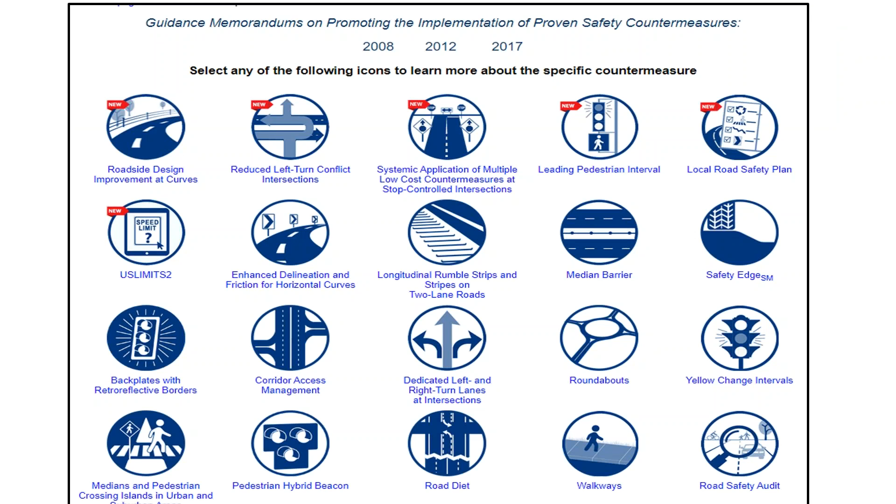So here's our list of 20 countermeasures from their website. Not all of them necessarily deal with rural roads, so we're going to whittle this down today to talk about, I think, 6 or 7 of these.

First, a little background on roadway departure safety. Those are the type of crashes we're really trying to focus in on, on our 2-lane rural roads, to help decrease this type of crash, the roadway departure crash. Some of these countermeasures are designed to keep vehicles on the roadway, like our signage and pavement markings, friction, things like that.

And then some of the countermeasures are designed to provide for a safe recovery if the car does go off the side of the road, so they can come back onto the roadway quickly and safely. The third type of countermeasure is where there's going to be a crash — they've left the roadway and are going to crash into something — so we want to reduce the severity of that crash with different hardware and strategies.

So which of those 20 proven countermeasures are applicable to 2-lane rural roads? Today we're going to look at 7 of these. First will be enhanced delineation and friction at horizontal curves.

And then next was the systemic application of multiple low-cost countermeasures at stop-controlled intersections. And then we'll get into the rumbles, longitudinal rumble strips and stripes on 2-lane roads. And then we'll talk about the safety edge, and the roadside design improvement at curves.

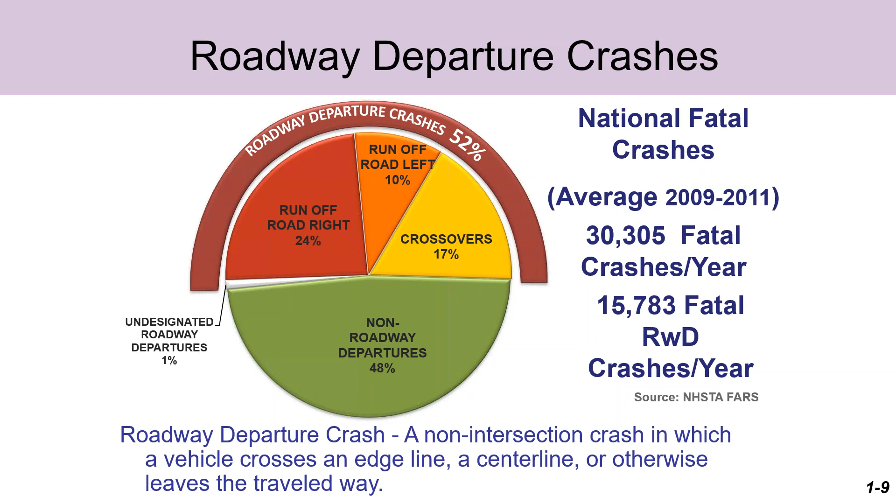First, let's define what a roadway departure crash is. It is a non-intersection crash in which a vehicle crosses an edge line, a center line, or otherwise leaves the traveled way. So you see some statistics there in that chart. Roadway departure crashes make up 52% of all our fatal crashes. It breaks down further into run off the road right, run off the road left, crossovers, and other types of non-roadway departure crashes.

So these countermeasures we're talking about today are part of our strategy called the systemic approach to safety. It's the reverse of the traditional approach, which involved focusing on hot spots, doing safety studies, and usually putting together a higher priced roadway safety project, like straightening out curves or adding lanes to traffic or something like that.

So the systemic approach involves low-cost countermeasures, and we place them where we find overrepresentation. We install these countermeasures systematically at numerous locations, not limited to the hot spots on your crash map.

So overrepresentation — if these crashes say 5% of the mileage equals 20% of the statewide problem — we're focusing on a statewide reduction of roadway departure fatalities. To give you an even better idea what we're talking about with systemic, let's take a look at this exercise from our roadway departure class here at LTAP.

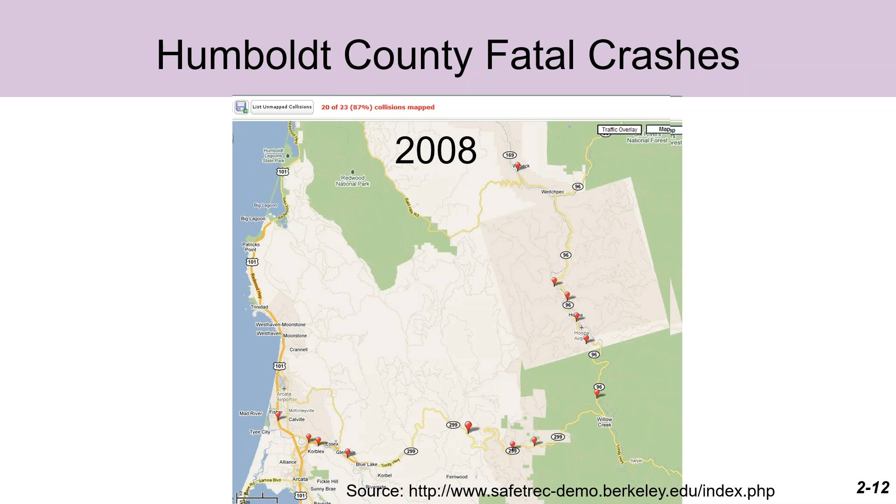You'll see there's some red dots more on their western edge and a couple on the eastern edge. In 2007, we see some more on the south side and one on the far northeast. None of these crashes occurred in the same curve. And same way with 2008, they had several more fatal crashes on the south side of the county and east side of the county, but none in the same curve from previous years.

And so it's a different location for each one of these fatal crashes over the 4-year period.

But then we take a look at the fatal crash types instead of the locations. We focus on the crash type from 2005, 2006, 2007, 2008, and you'll see that the top 3 types of collisions each year are head-on, side swipe, and rear end. And if you look at the percentage of crashes involving those top 3 across each year, you'll see that even the percentages are very similar. So the conclusion would be that fatal crash locations are random in that scenario.

However, the fatal crash types are predictable. And so here's a couple examples of townships. In Ohio, we're kind of famous for our rural township curvy roads. They look very much like that Humboldt County location, don't they?

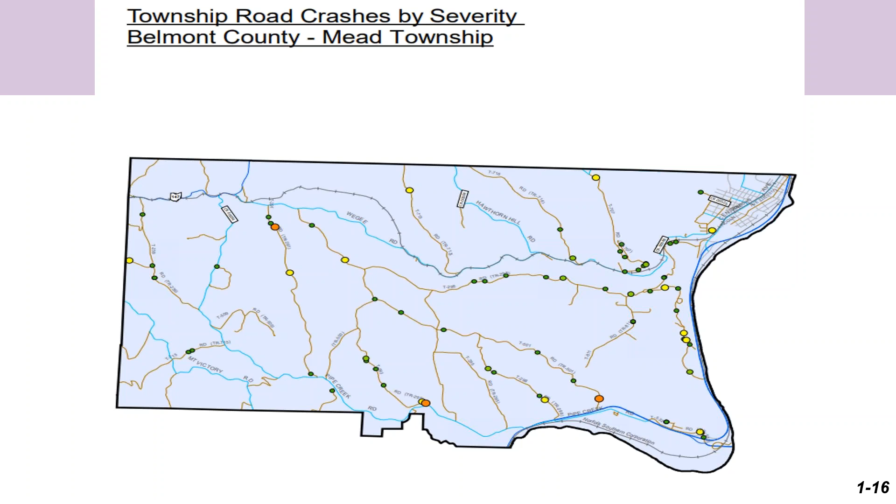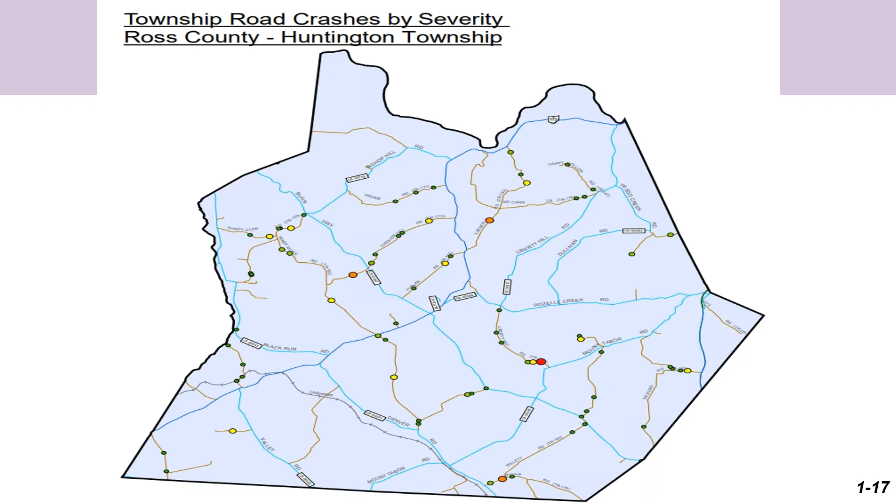So here's Mead Township in Belmont County. You see lots of different dots and different curves. And here we have Ross County, Ohio, Huntington Township. All these crashes are happening in different locations, different curves, for instance.

So we want to apply our low-cost treatments systemically, where we have these similar types of locations. So let's take a look at these different countermeasures. We'll start off with the first one on the list, enhanced delineation and friction for horizontal curves. Again, we're focusing on curves here.

There's so many of our rural road crashes on two-lane roads that happen in curves. A majority happen in curves. So if we can improve the safety on the curves, we're getting a lot of bang for our buck, big time. If we take a look at the data, curve crashes account for 42% of rural roadway departure fatalities, so definitely some room for improvement there.

Let's take a look at our enhanced delineation treatment. These help alert drivers in advance of the curve and vary by the severity of the curvature and operating speed. Price ranges for these strategies are low to moderate. Let's take a look at some of these. The picture there is an example of chevron signs installed along a curve.

Crash types addressed by delineation are curve crashes and head-on collisions. A lot of head-on collisions happen within curves, or people go out of their lane and cross the center line. Nighttime crashes are also addressed, because with the latest delineation and signage they've improved retroreflectivity for nighttime driving, and other run-off-the-road crashes.

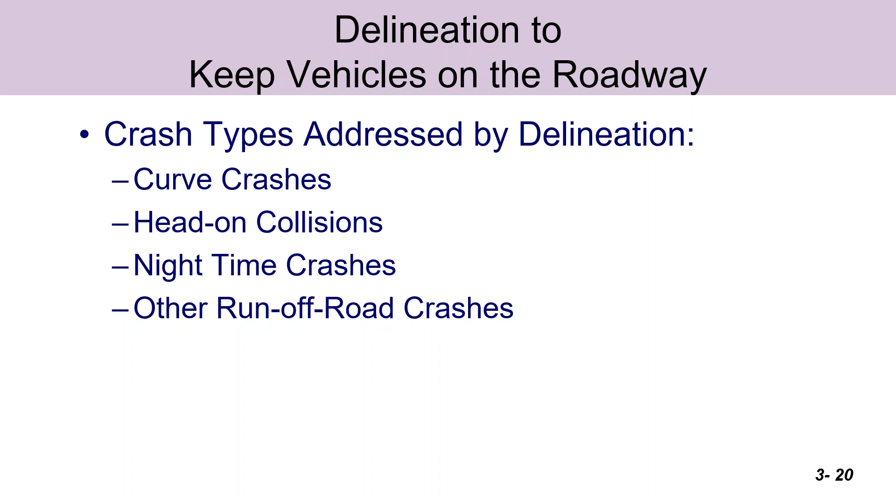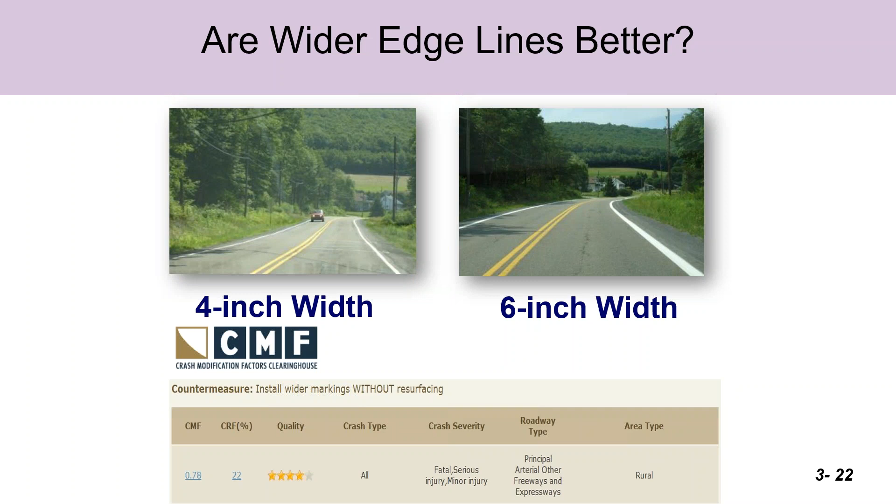There's also pavement marking. The OMUTCD and the national MUTCD have requirements for the use of edge lines, and we can even improve on them. The standard edge line is 4 inches. One improvement you can make is to make those white edge lines 6 inches wide throughout your curve to give better guidance as someone traverses through the curve.

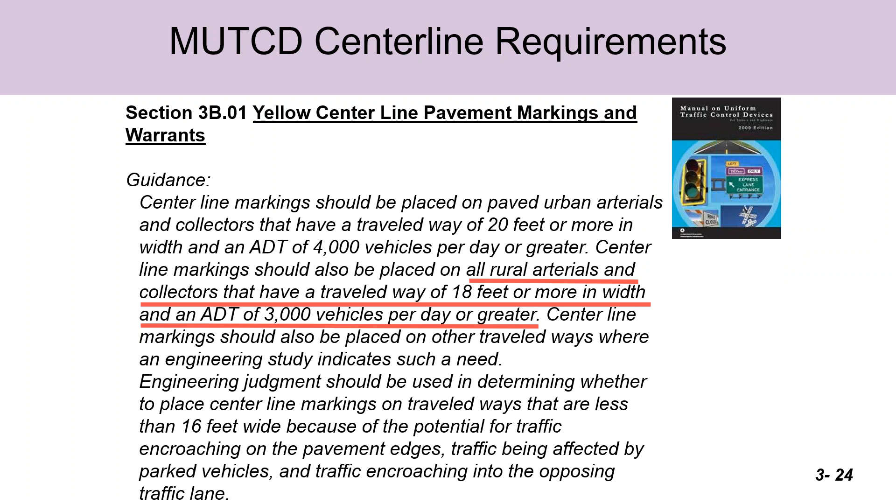Also, yellow center lines are required on a lot of roads that have 3,000 vehicles a day or greater. It turns out there's not a law against putting a yellow center line on roads that have less than that. Under guidance, it says 3,000 and over. And some roadways have been studied with even fewer cars than that for the center line treatment, and they reduce crashes as well.

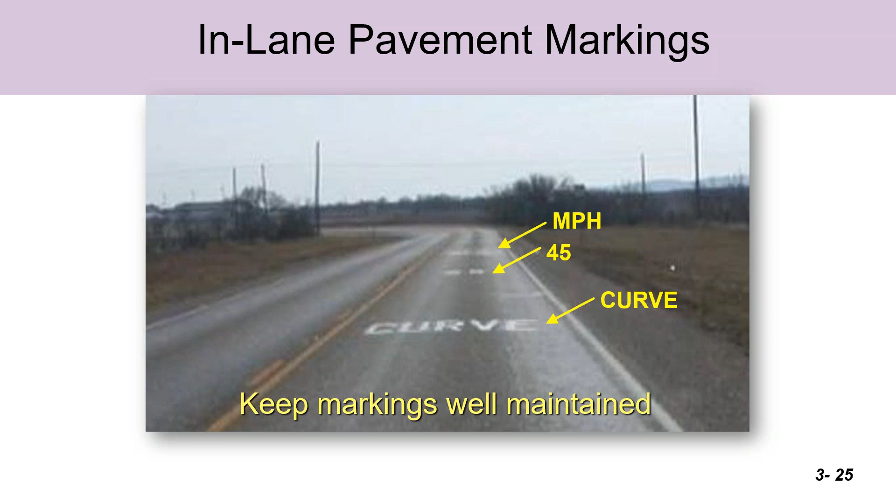Other types of pavement markings are in-lane pavement markings. There's an example of just the curve written on the pavement along with the speed limit. Here's a PennDOT example of an advanced curve warning for the in-lane pavement marking.

Also, if you have a guardrail on your curve, it's always good to have a reflective barrier delineation. You should make sure that, as you see in these pictures, you have retroreflective sheeting on the guardrail itself to provide guidance through the curve.

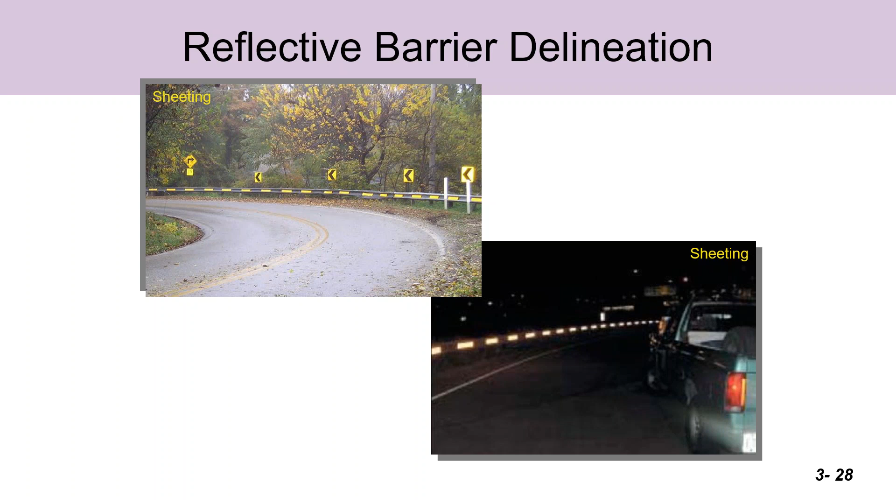Some statistics about the benefits of providing advanced warning signing for curves: the Crash Modification Factors Clearinghouse, through their studies, shows that just putting up a sign in advance of your curve, like the one in the picture, can reduce your crashes by 30%. That's an amazing bang for your buck for just the cost of a sign. The more information you provide to the motorist in advance of the curve, the safer they will be.

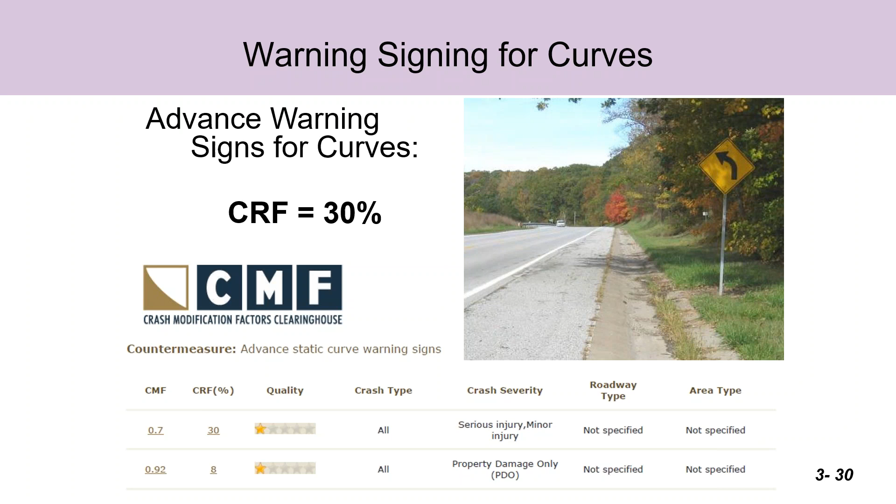There's also guidance here in the National Manual, as well as the Ohio Manual of Uniform Traffic Control Devices, about what is required for signage and delineation in your curves. This lets you know when an advanced warning sign is required, when an advisory speed plaque is required or recommended, and chevrons as well.

Again, here's a chart that helps with the requirements of your horizontal alignment sign selection—what's required and what's recommended when it comes to the difference between the speed limit and the advisory speed.

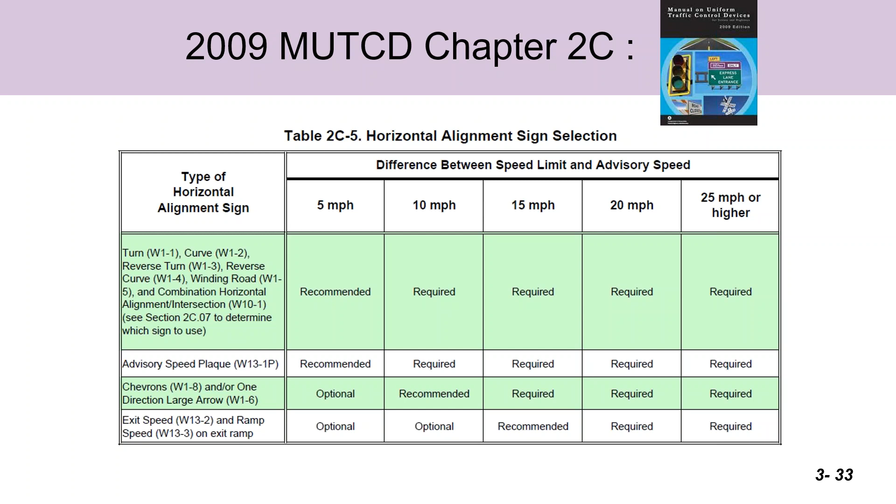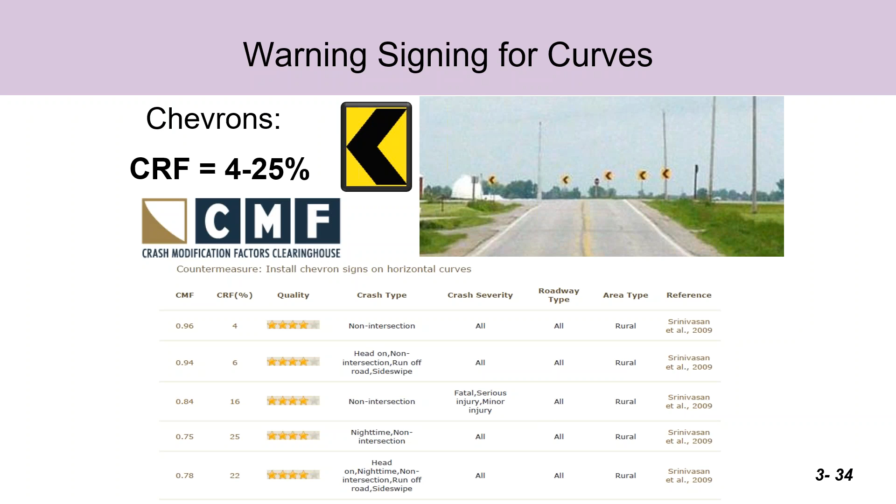Here's some more information on chevrons. Studies show crash reduction anywhere from 4 to 25% just for putting chevrons in your curve. As you can see going down, the bottom one covers head-on crashes, nighttime crashes, run-off-the-road, and side-swipe crashes. They had a reduction in crashes of 22%, compared to places where they did not have chevrons.

Another thing that really improves the guidance throughout the curve is to add post-mounted sheeting or post-mounted delineation to the chevrons, the large arrow, or your advanced warning signs. It really makes those signs stand out—you can't miss them.

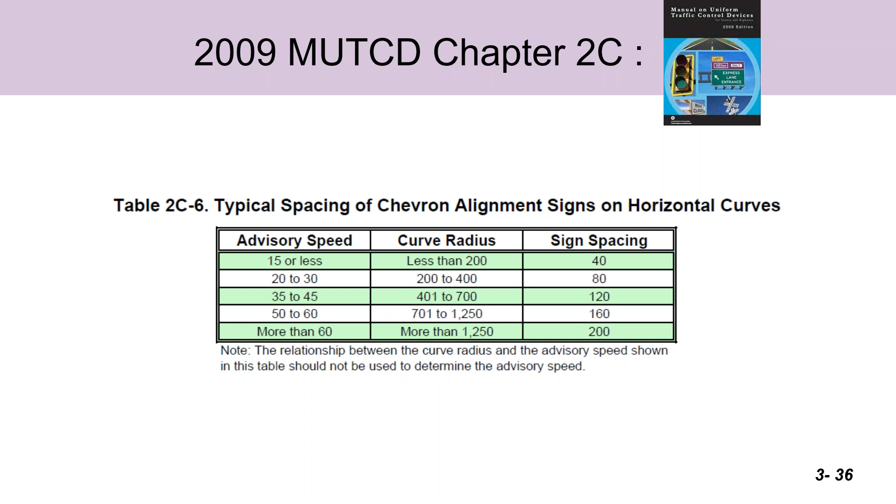There's also a chart in the MUTCD and Ohio manual to help you determine the proper spacing of your chevron alignment signs throughout the curve.

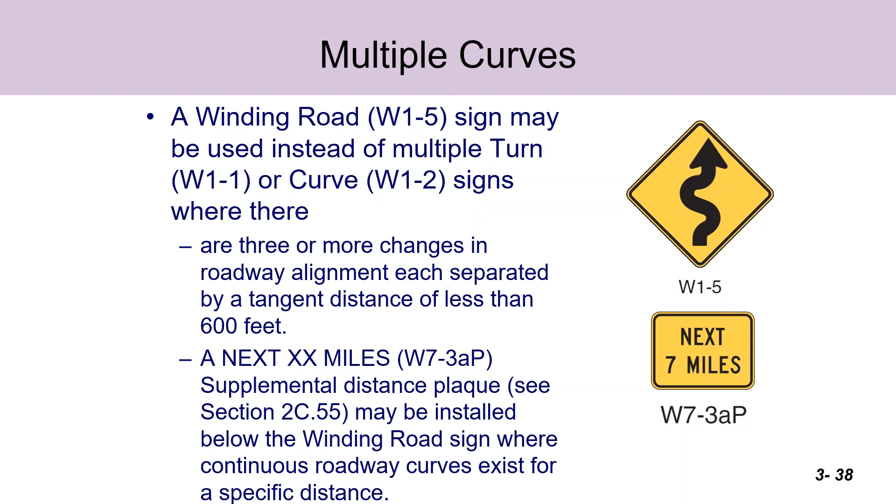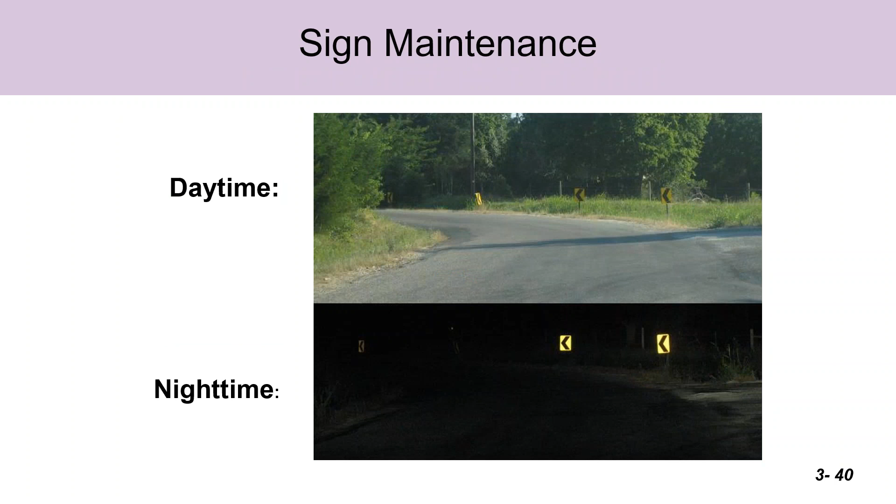Also take regular care to make sure your signs are where they're supposed to be for chevrons. If they're not aligned properly for the headlights, as you can see in this picture, some of those chevrons don't show up at night.

Vegetation management is also very important throughout the spring and summer, making sure the motorist can actually see those signs in advance. It's important to have a good vegetation management program as well.

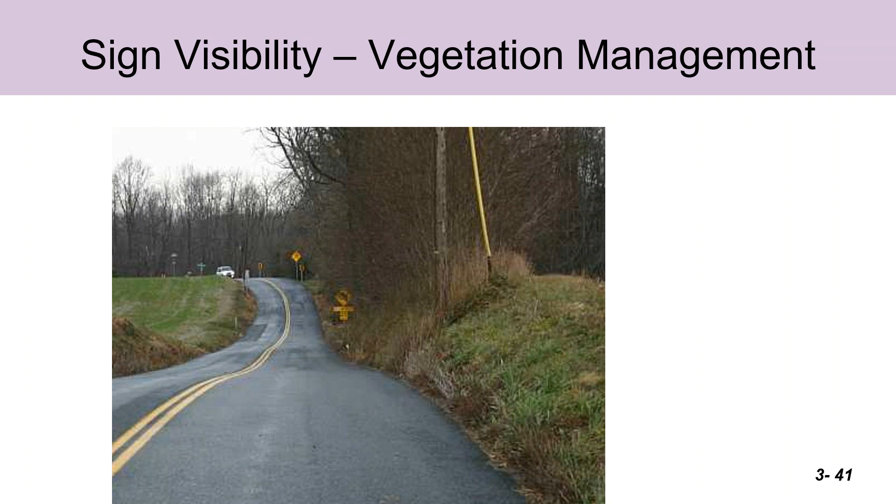Let's move on to the next countermeasure: increased pavement friction for curves. This involves a high friction surface treatment, or HFST, another one of our highly cost-effective countermeasures.

High friction surface treatments compensate for the high friction demand at curves, where available pavement friction is not adequate to support operating speeds, due to situations like sharp curves or inadequate cross-slope design.

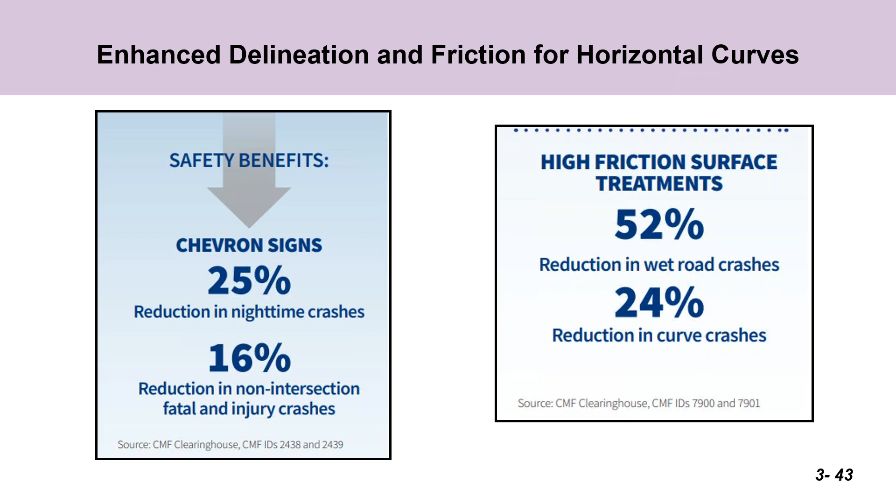There are some benefits and statistics involving friction and signage. Safety benefits: chevron signs show a 25% reduction in nighttime crashes, 16% in non-intersection fatal and injury crashes. High friction surface treatments show a 52% reduction in wet road crashes and 24% reduction in curve crashes. I've seen much higher percentages for that as well.

Here's how friction enhances your safety during wet conditions. Polished roadway surfaces occur where the roadway hasn't been resurfaced in a number of years, so the aggregate becomes polished and you lose friction value.

Even speeders, if they're exceeding the advisory speed significantly, run the risk of skidding off the roadway. So we need to provide skid-resistant pavement surfaces to reduce the likelihood of a vehicle leaving its lane, crossing the centerline, or leaving the roadway at a horizontal curve.

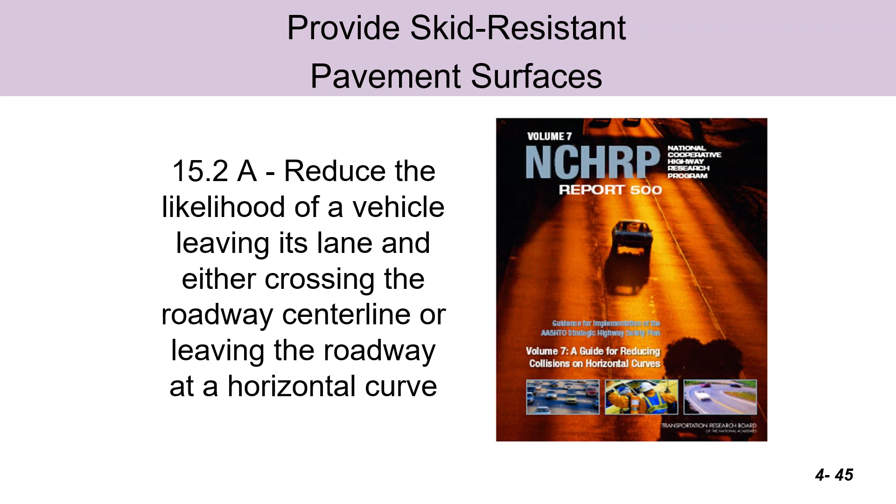This was focused on in the NCHRP Report 500, Volume 7.

United States Code 402 states every state shall have a program to improve highway safety, with standards for pavement design and construction with specific provisions for high skid resistant qualities. Each state shall also have a program for resurfacing or other surface treatment, with emphasis on correcting locations or sections of streets and highways with low skid resistance and high or potentially high accident rates susceptible to reduction by providing improved surfaces.

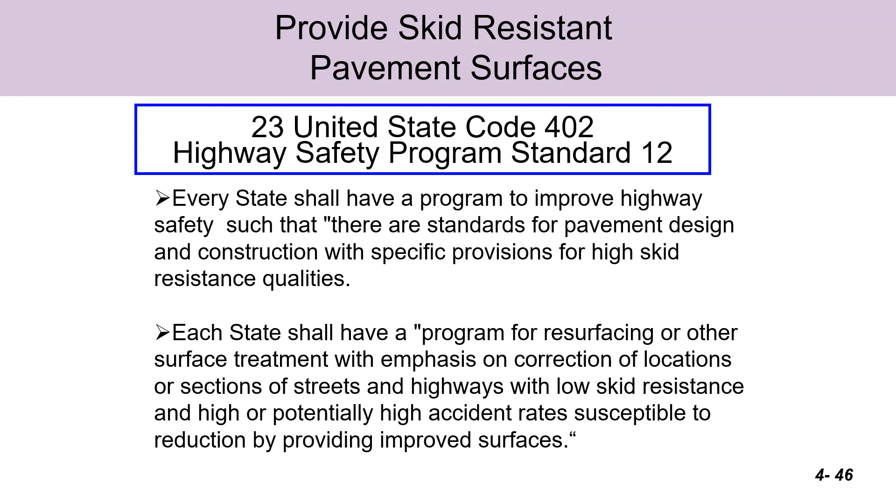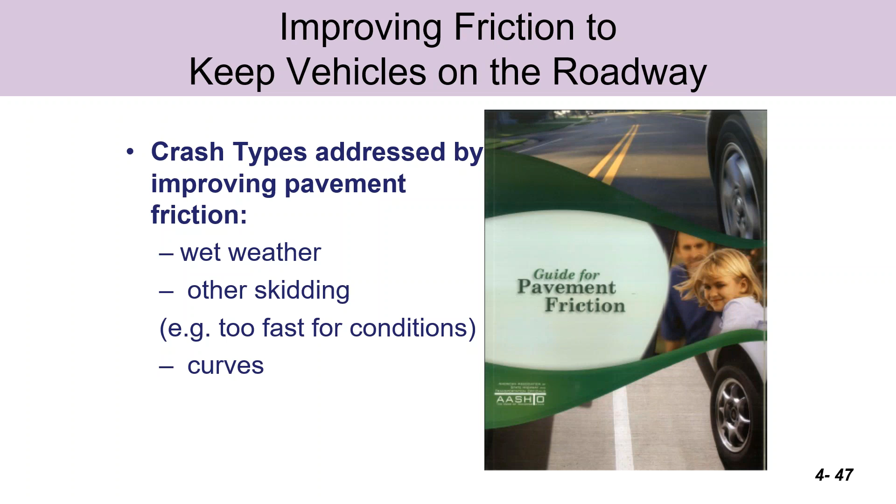Improving friction helps keep vehicles on the roadway. Different crash types addressed by improving friction include wet weather skidding, other skidding, and of course curve crashes, which we're focusing on today.

There is guidance material that provides more information on this through NCHRP. You can actually Google this document and download it for free: NCHRP web-only document 108, Guide for Pavement Friction.

Some strategies for reducing crashes: where can friction benefit safety? At locations like horizontal curves, the approach to intersections where people need friction to help them come to a stop, and different grades, such as downhill grades.

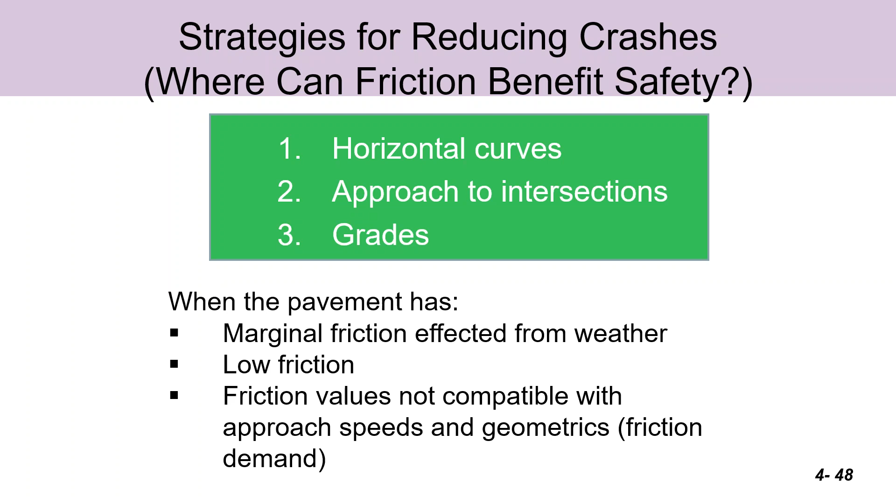Some other factors related to skid crashes include road geometry, vehicle speeds, driver actions, weather conditions, and traffic characteristics.

We can really get into some of the science of friction, which of course involves the laws of physics at play as you drive through a curve. The margin of safety against skidding on curves is defined as the difference between the available tire pavement friction and the friction demand of the vehicle as it tracks the curve.

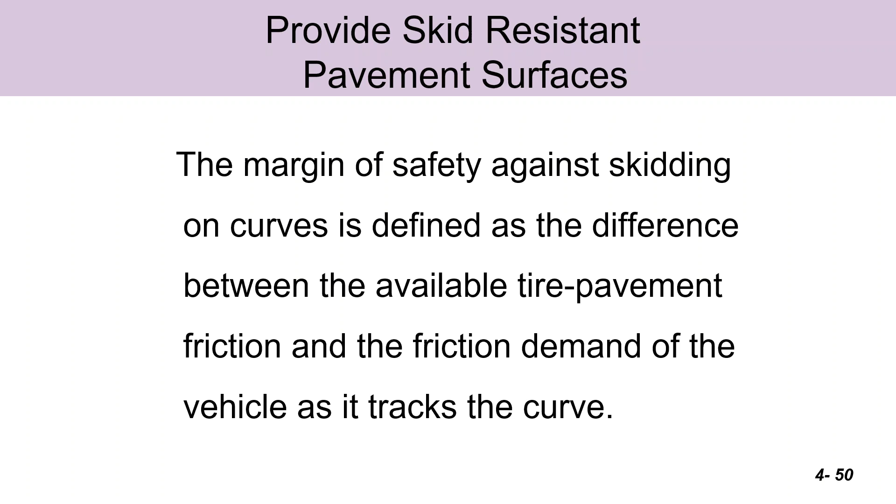If we can improve on the friction, we can improve the vehicle itself and keep it on the roadway at that speed. Here's an AASHTO horizontal curve design model. The equation in the top left says E plus F. E is super elevation of the curve, like a NASCAR track, and F is the side friction factor. Those two values are your friends as you drive through a curve — they are the only two forces keeping you on the roadway.

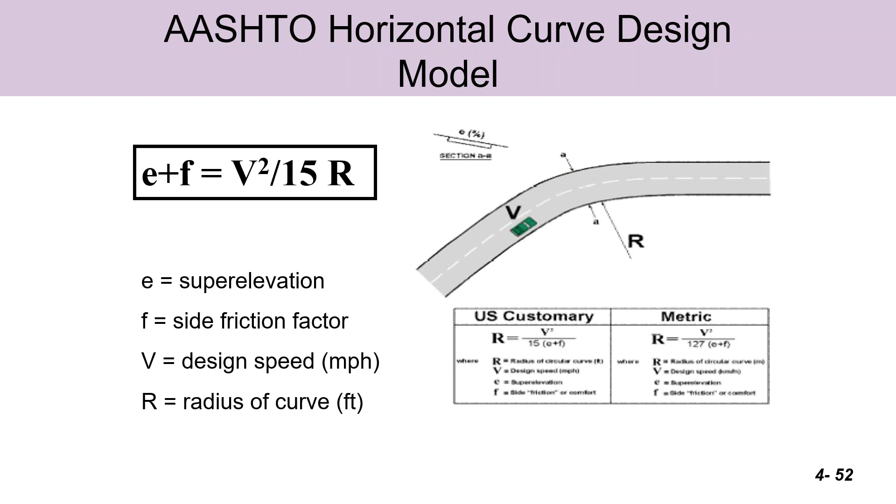The problem with our rural roads is that a lot of them have no super elevation, so all you're left with is your side friction factor helping you. It's very important for our two-lane rural roads without super elevation to make sure they have a good level of friction.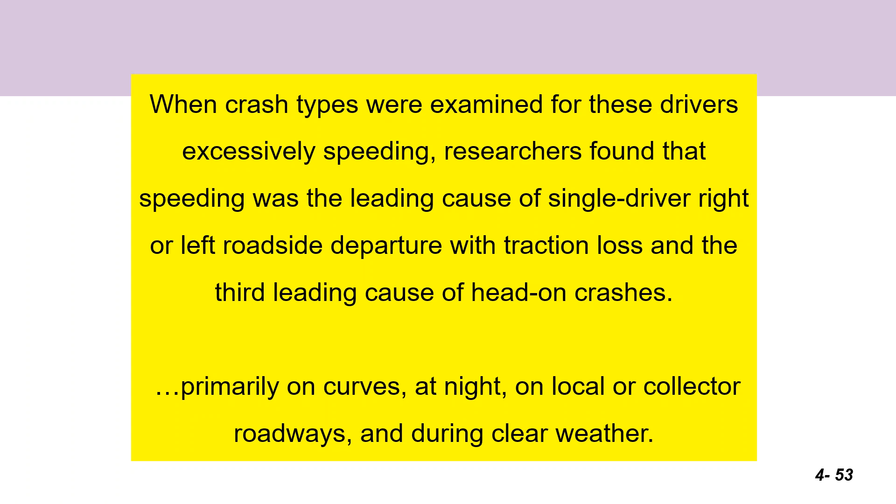Skidding-type crashes happen primarily on curves at night, on local or collector roadways, and during clear weather — so even on dry pavement, these skidding crashes happen in curves. Another vehicle that has problems with curves is big trucks. You've heard about trucks rolling over at interchanges and in curves. When they study these rollovers, they determine that before the truck rolled over, it actually went into a skid first. So if we can prevent them from skidding by improving friction, we can prevent the rollover.

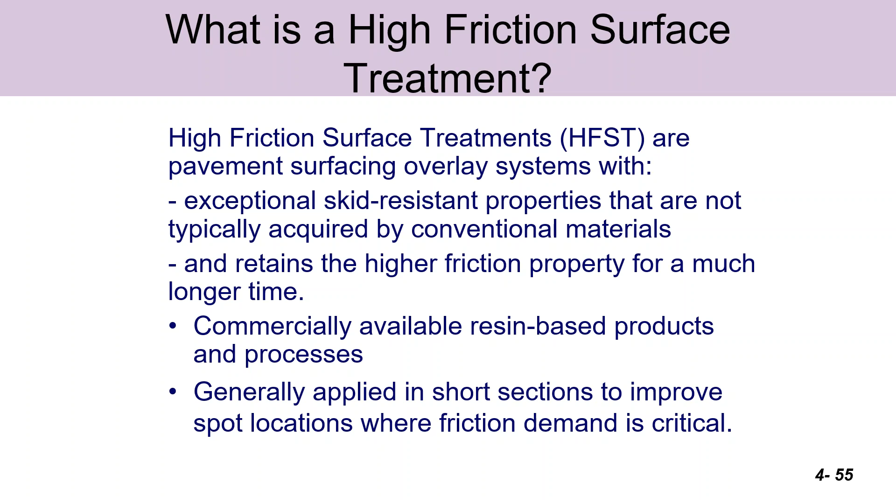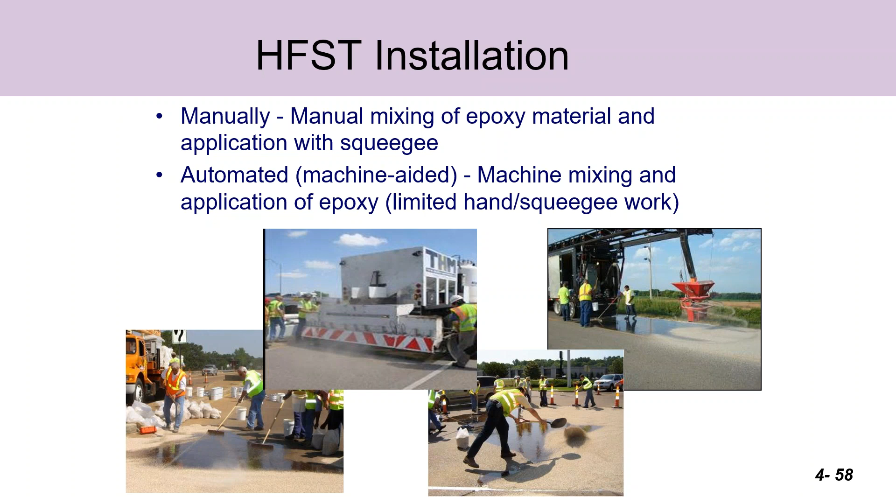Here are some pictures of an HFST installation. You see the workers on the left spreading out the resin, and the second picture is a machine that spreads the aggregate evenly. There are other ways to do this too, even by shovel or by hand — the fourth picture shows a machine that distributes the aggregate.

We even tried this in Ohio, in Hamilton County. This county road had a high number of curve crashes running off the road. In the year after this HFST was installed, there were zero curve crashes — what a reduction that was.

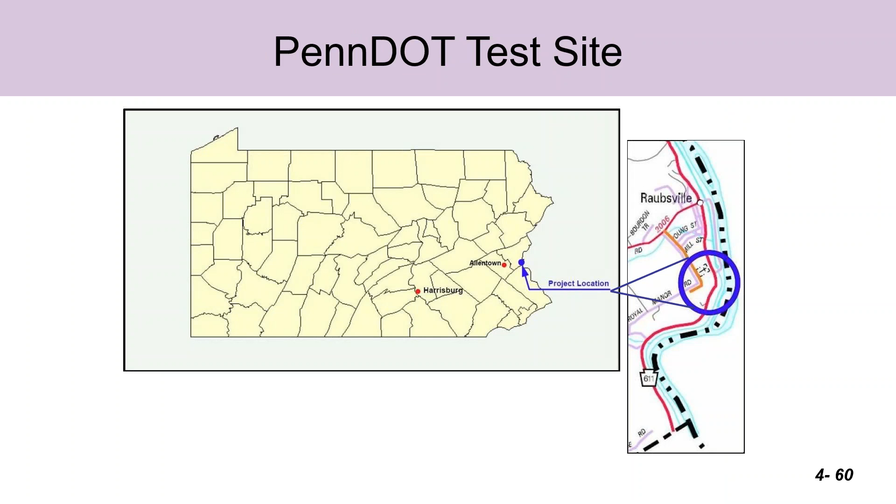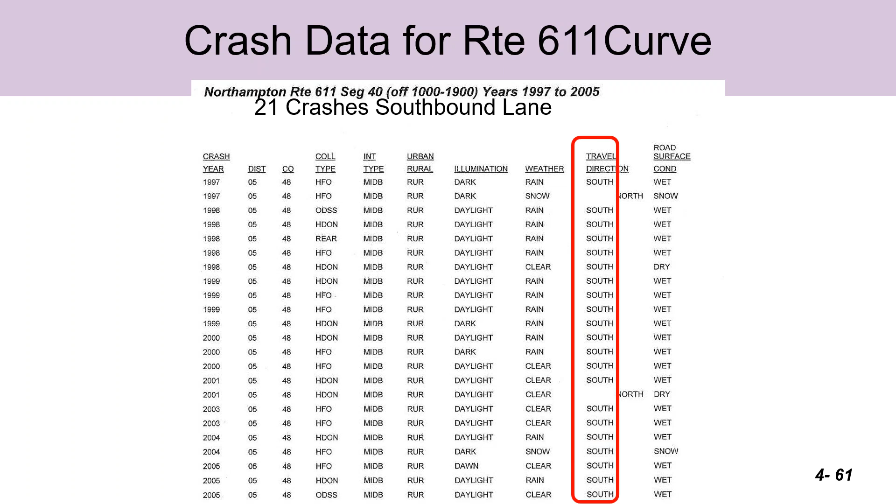When this first came out back in 2012, I believe, there were lots of studies in several states. PennDOT, for instance, studied a curve here. As you can see in the second-to-far-right column, all the crashes in this curve involved southbound vehicles, so they wanted to try the HFST treatment in the southbound lane. The crew came out at 8:30 a.m. and began their project, installing it, and by 2:30 p.m. that afternoon it was ready for traffic.

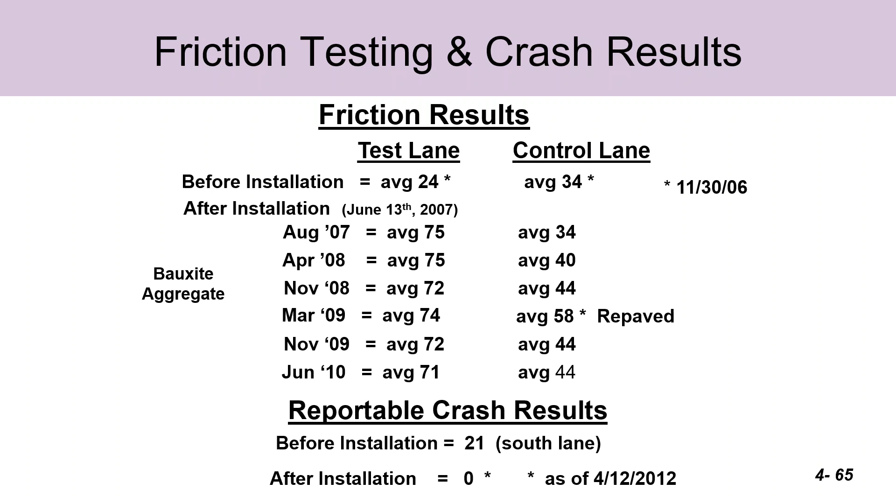The results show: before installation, there were 21 crashes, and the friction value was improved — the 75 represents a very high friction value compared to the control lane. In the year following installation, there were zero crashes — so it went from 21 crashes to zero. You get really big, really good results from that friction treatment. We want to see that friction treatment more often here in Ohio on our two-lane rural roads.

Okay, let's move on to our next countermeasure — a systemic application of multiple low-cost countermeasures at stop-controlled intersections. You've probably seen this before, our LTAP sign grant. We've been pushing to have these sort of treatments when we buy road signs for our townships. It involves more advanced warning, like doubling up on the advanced warning signs for the stop condition at the intersection, and also for the through approach, doubling up on the advanced warning signs for the intersection.

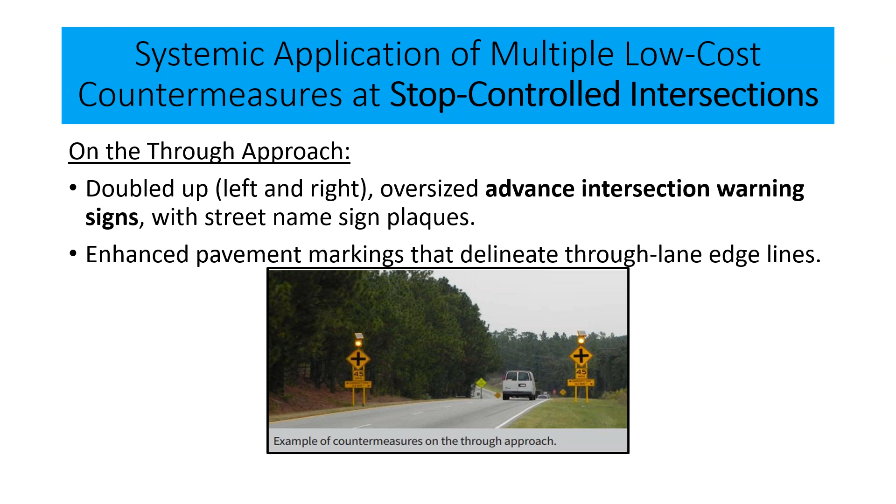So doubling up and using oversized advanced intersection warning signs, even adding street name sign plaques, basically providing more information to the motorists as they approach the intersection, and also enhancing pavement markings that delineate the through lane edge lines, and also a properly spaced stop bar at the intersection.

And there's other countermeasures as well: flashing solar LED beacons on advanced intersection warning signs and stop signs, or a flashing overhead intersection beacon, reflective panels on signposts.

Those are definitely very helpful, and I think they're like $4 a piece, but they sure do provide really good advanced warning. Dynamic warning signs, the flashing electric signs that have messages.

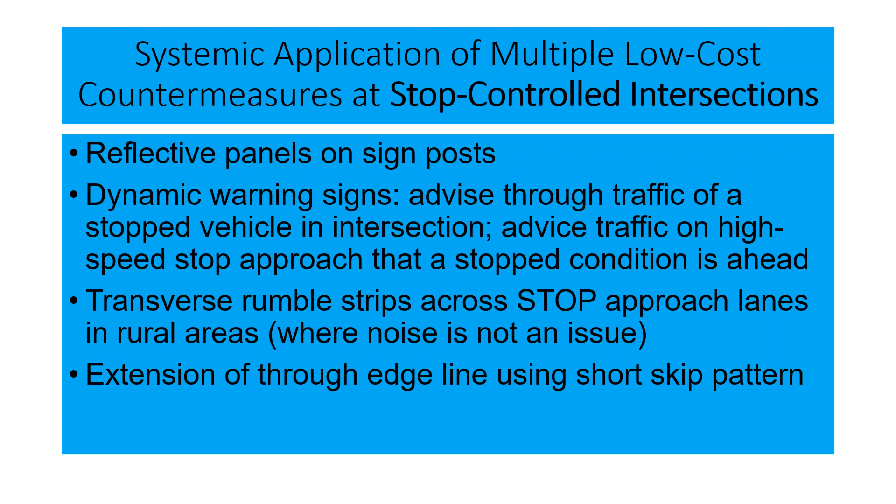Also transverse rumble strips across the stop approach lanes, and the extension of the through edge line using a short skip pattern. And there's more to the list: skid resistant surfaces, new upgraded lighting, some pavement marking treatment called lane narrowing, peripheral transverse pavement markings, and dynamic speed warning signs.

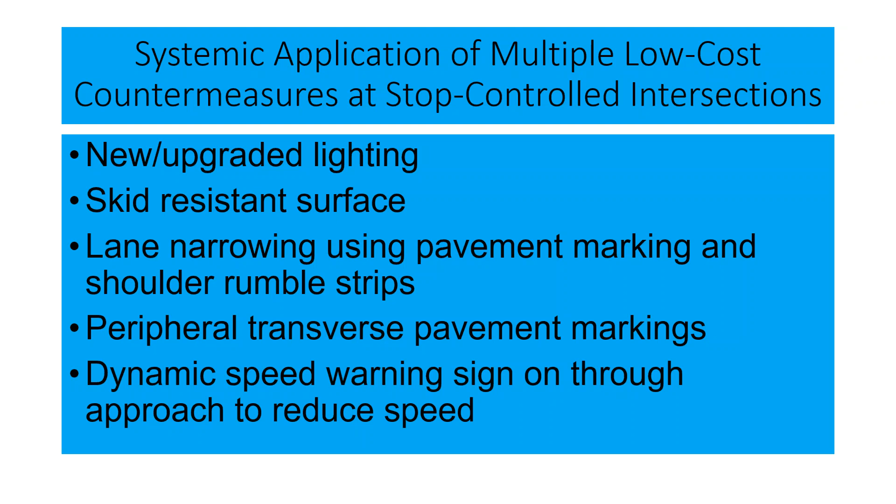So these are all part of this initiative. Even like you saw it from Pennsylvania, where they put 'slow' on the pavement markings. Let's put that word on the pavement. Other high friction surface treatment.

Of course, roundabouts would even fall into this category. Adding left turn lanes at an intersection definitely adds safety. Or making sure an intersection is a 90-degree angle instead of skewed. That makes it safer. Okay, next we have our next initiative involves the rumble strips and stripes.

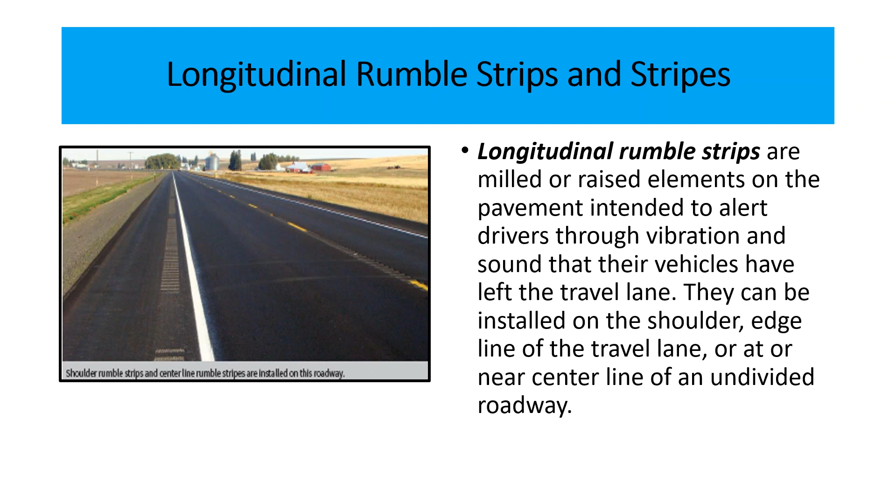And so these are either milled into the pavement or raised, and they are intended to alert drivers through vibration and sound that their vehicles have left the travel lane. They can be installed on the shoulder, the edge line of the travel lane, or at or near center line of the undivided roadway. And so a rumble stripe is where we put the rumble strips right on the edge line.

And this can result in an increased visibility of the pavement marking during wet and nighttime conditions, which is a very good benefit. And it goes on to show you some data of the safety benefits.

There's a 44 to 64% reduction in head-on collisions or opposite direction crashes or side swipe fatal and injury crashes. The shoulder rumble strips go anywhere from 13 to 51% reduction of single vehicle run off the road fatal and injury crashes.

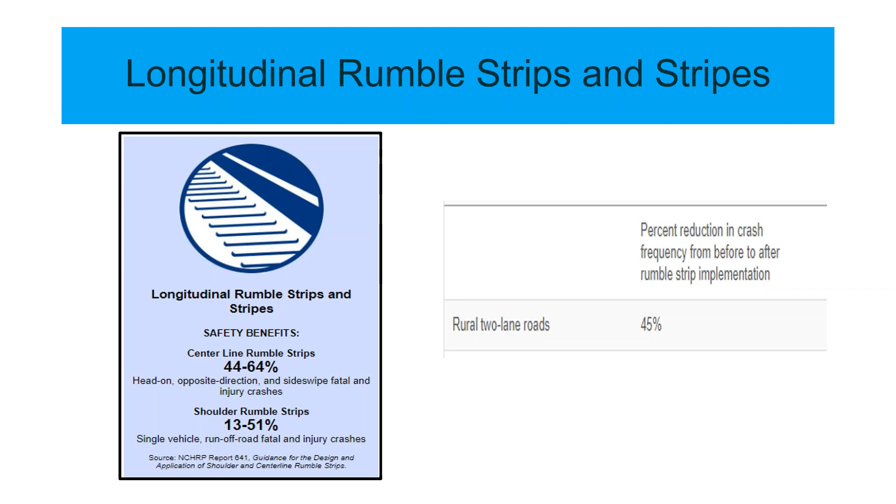So the other one on the right shows a 45% reduction in crash frequency after installation of rumble strips on rural 2-lane roads. So we want to see more rumble strips and stripes in Ohio on our 2-lane rural roads. You can read further about it in a booklet called the Decision Support Guide for Installation of Shoulder and Centerline Rumble Strips on Non-Freeways.

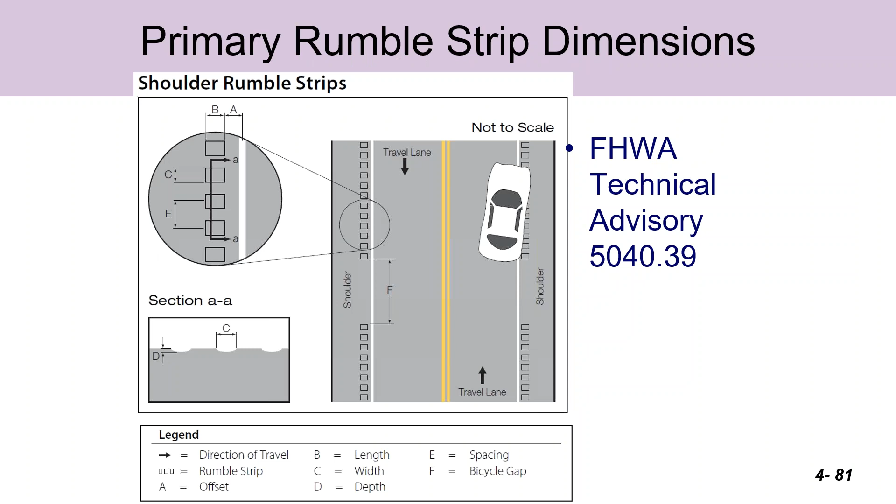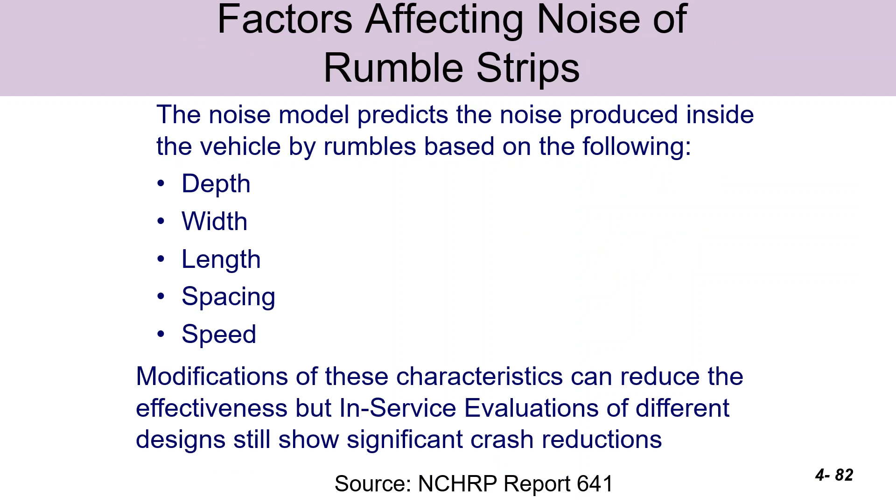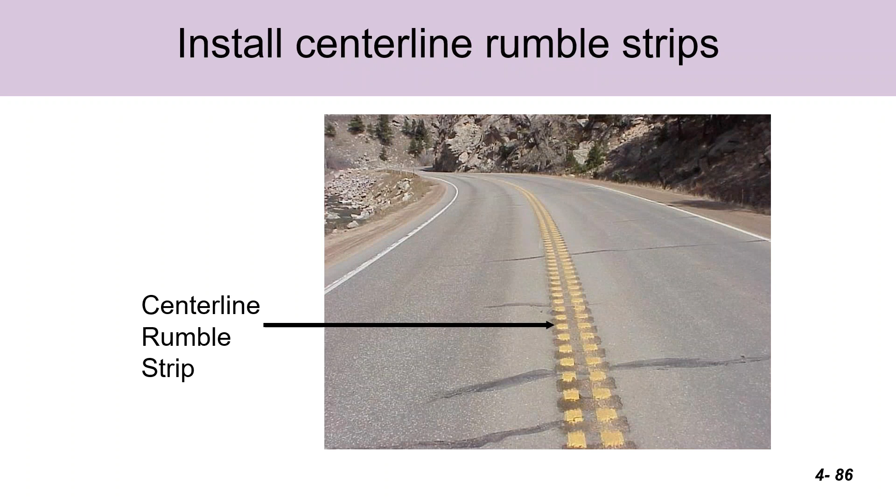Okay, what else do we got here? Different variations of the centerline rumble strips. They're on double yellow, actually milled into both sides of the double yellow line. And they're milled across the markings, across the joint, or on both sides of the joint. So there's different ways to do it depending on the road you're on.

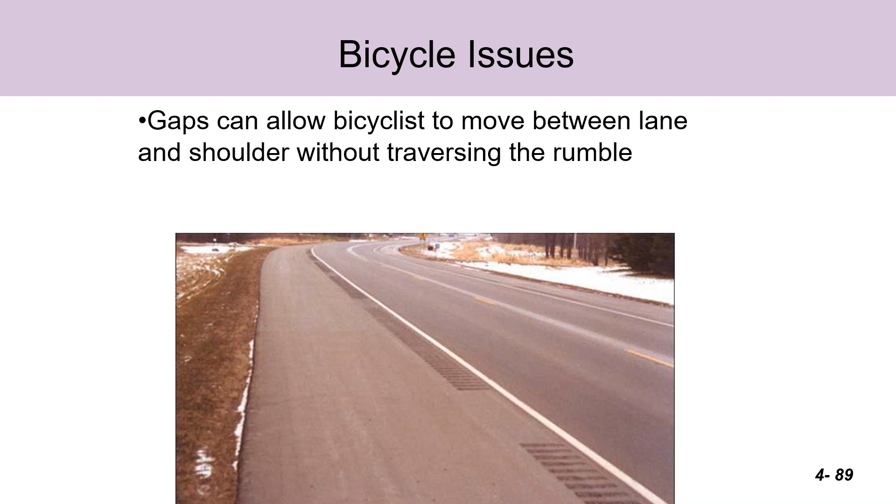And if you're thinking that the bicyclists will hate these, we actually have a way to make them bicycle friendly by providing a gap every, you know, whatever distance you select, 30 or 40 feet or more, so they can go in and out, because bicyclists actually prefer to be in the lane if cars are not coming, because there's less gravel and broken glass and stuff in the lane versus on the shoulder.

Okay, and it of course also helps them to hear the traffic coming from behind them as well. Also motorcyclists, you might think won't like these, but there's a big study of 9,845 motorcycle crash reports, and the conclusion of the study was no indication that centerline rumble strips pose a hazard to cyclists. So that was good.

Also, you can even put the rumbles in chip seal pavements. It's been done in many places.

So we don't see any reason why not to provide rumble strips on our rural roads.

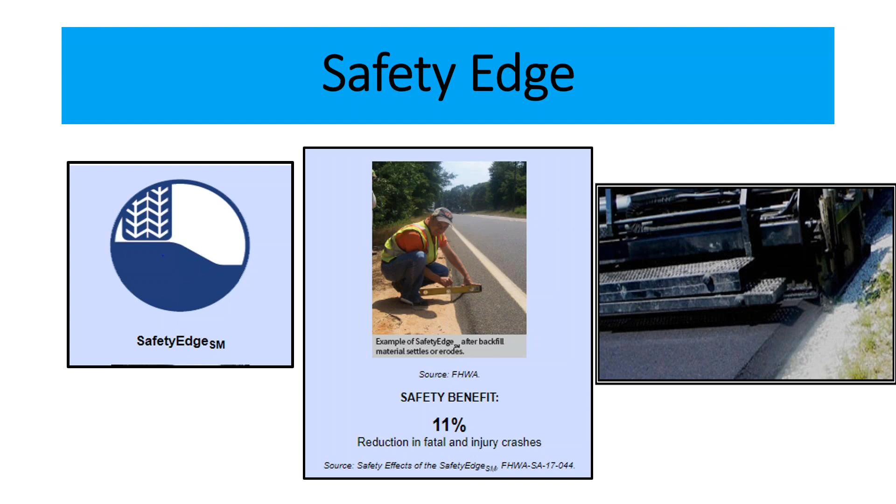So our next countermeasure is our safety edge. It's been around for quite a while, but it's still on the list because it does such a good job in reducing crashes.

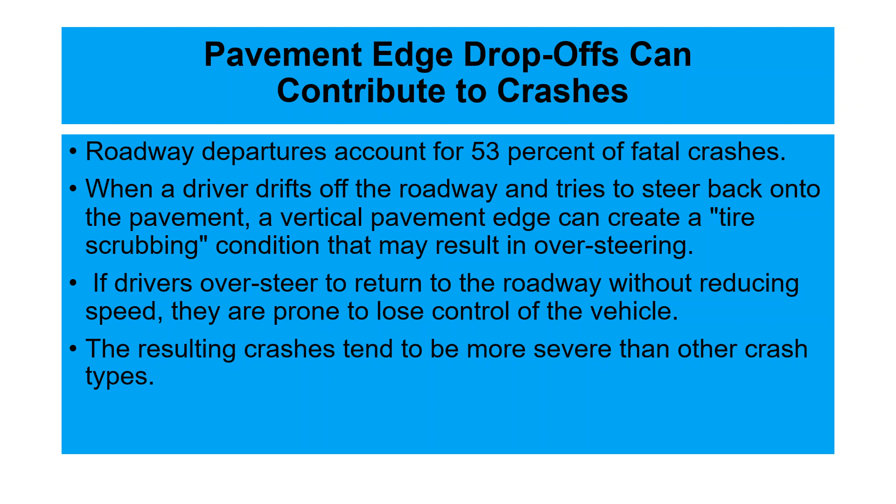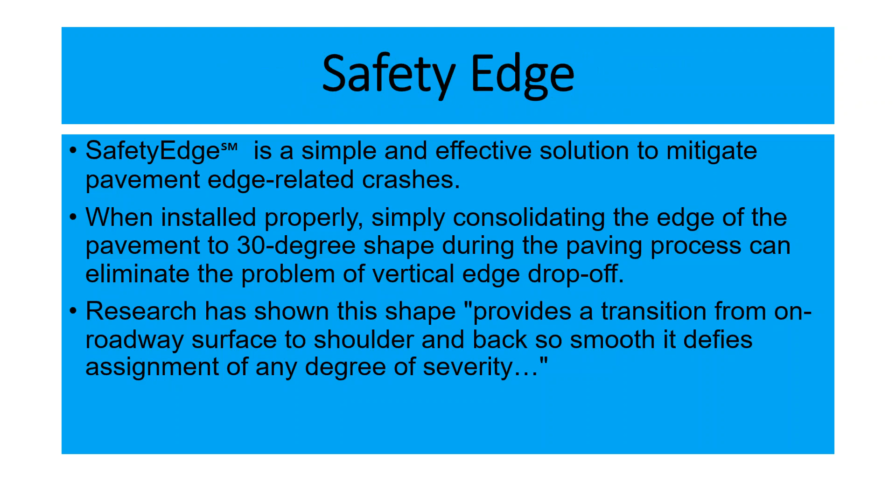The safety edge is a solution to this because it provides a 30-degree angle shape on the side of the pavement, making it very easy for the car to get back onto the pavement and stay in their lane. Calculated benefit cost ratios are very high, 500 to 1,400, but that's because there's hardly any cost to adding this to your repaving operation.

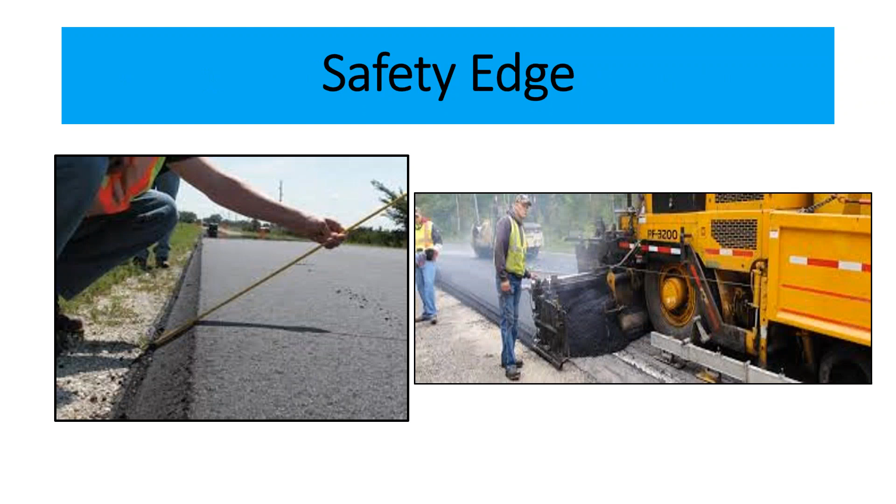So you definitely need to check out adding the safety edge to your next resurfacing project. Make it your policy to do so on your 2-lane rural roads.

So we're doing that at ODOT as well. If you look at our spec book, our 2019 spec has been integrated into it, so you can check that out. And you can contact the Office of Pavement Engineering if you have any other questions about that.

What else do we have? The next countermeasure selected here is called Roadside Design Improvements at Curves. This involves either providing guardrail or cable barrier, or also installing a clear zone.

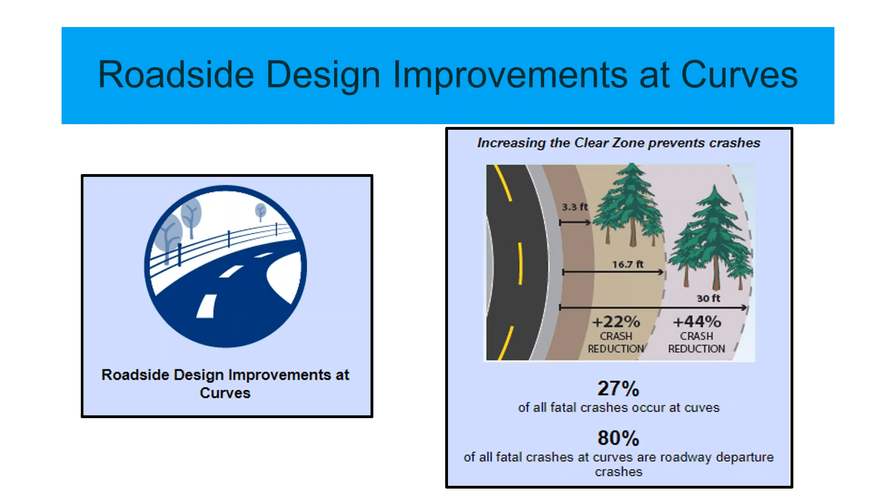That's because 27% of all fatal crashes occur at curves, and 80% of all fatal crashes at curves are roadway departure crashes. So roadside design improvements at curves is a strategy encompassing several treatments that target the high-risk roadside environment along the outside of a horizontal curve, and they prevent departure fatalities by giving vehicles the opportunity to recover safely and by reducing crash severity. These could be implemented alone or in combination and are particularly recommended at horizontal curves, especially where data indicates a higher risk for roadway departure fatalities and where cost effectiveness can be maximized.

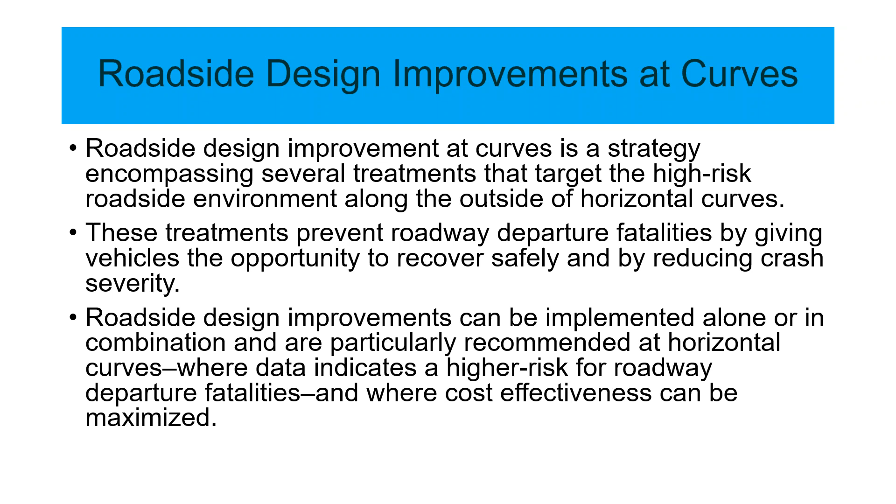Here's an example of providing for a safe recovery: installing a clear zone, which is an unobstructed traversable area beyond the edge of the through traveled way for the recovery of errant vehicles. That area is free of rigid fixed objects such as trees, utility cabinets, or poles. Trees can kill a lot of people, so do utility poles.

Another treatment is to flatten the slope of the side of the roadway, which reduces the steepness of the side slope to increase drivers' ability to keep the vehicle stable and regain control of the vehicle and avoid obstacles.

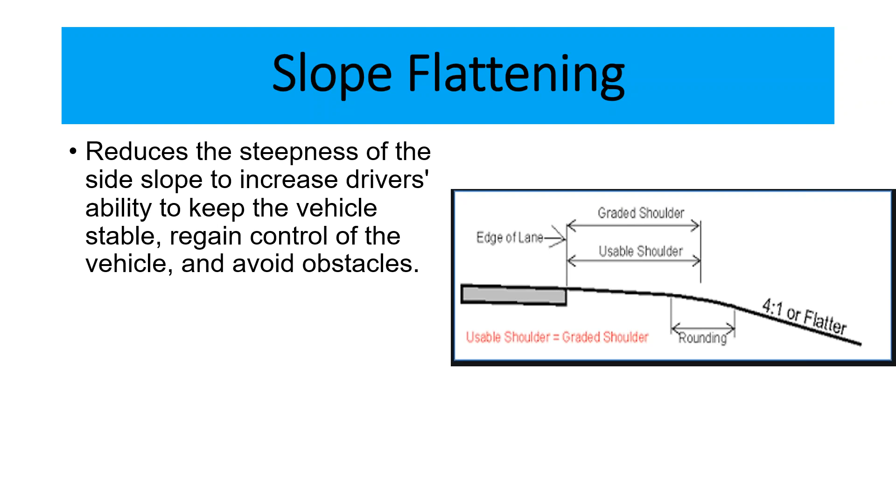Or we can shield obstacles, providing barrier for slopes, fixed objects, median barrier, and there are also new types of guardrail and barrier that have been upgraded to make them safer.

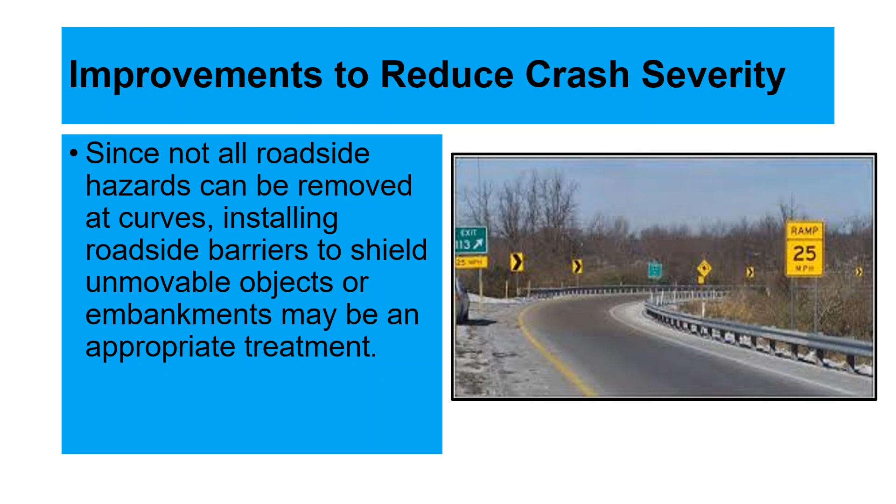Since not all roadside hazards can be removed at curves, installing roadside barriers to shield unmovable objects or embankments may be an appropriate treatment. There's a treatment, of course, along with the signage, we have delineation and guardrail there.

Cable barrier is one of the treatments at curves. It's a flexible barrier made from wire rope supported between frangible posts, and it may be the most versatile and forgiving barrier system available for reducing the severity of run-off-the-road crashes.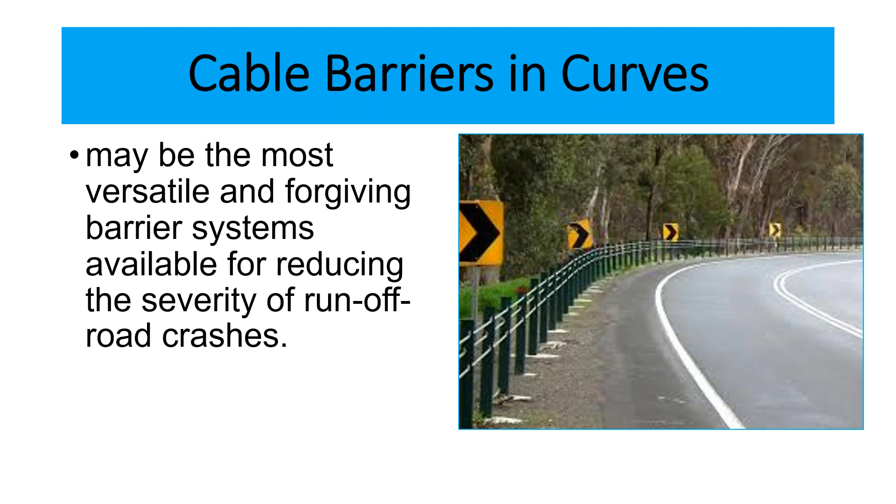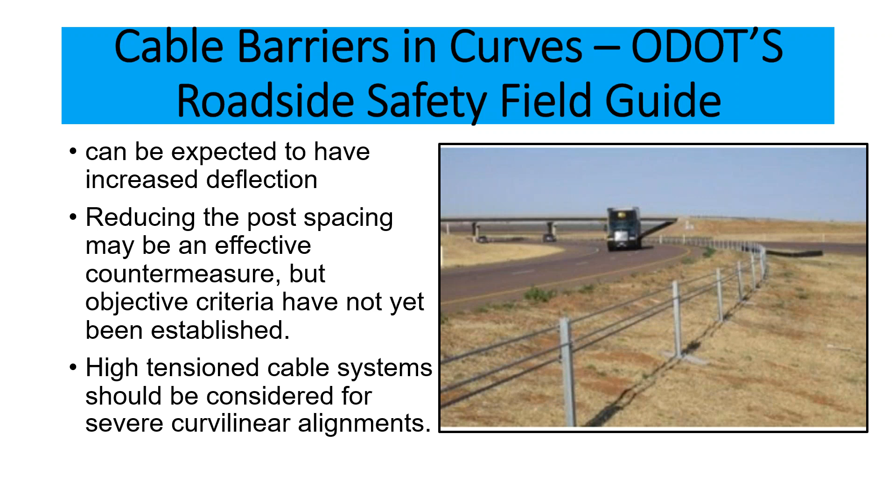So here's this from the ODOT Roadside Safety Field Guide, Cable Barriers in Curves. They can be expected to have increased deflection, so reducing the post spacing may be an effective countermeasure, but objective criteria have not yet been established. High tension cable systems should be considered for severe curvilinear alignments.

Then we have our regular type of guardrail, a semi-rigid barrier, usually either steel box beam or W-beam. These deflect less than flexible barriers, so they can be located closer to objects where space is limited.

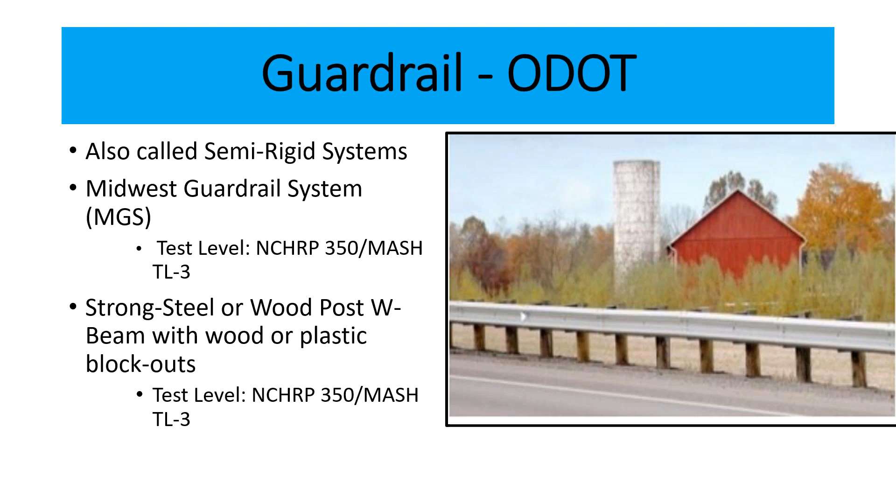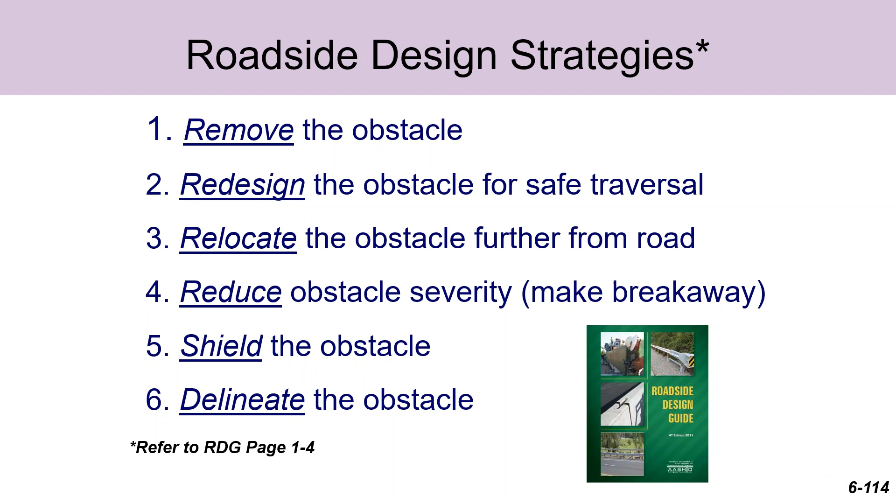Here's a list of roadside design strategies from the Roadside Design Guide. First, we would like to remove the obstacle in that curve, or redesign the obstacle for safe traversal, or relocate the obstacle further from the road, or reduce the obstacle severity by making it breakaway, like signposts, or shield the obstacle, or at least delineate the obstacle if we can't do anything else.

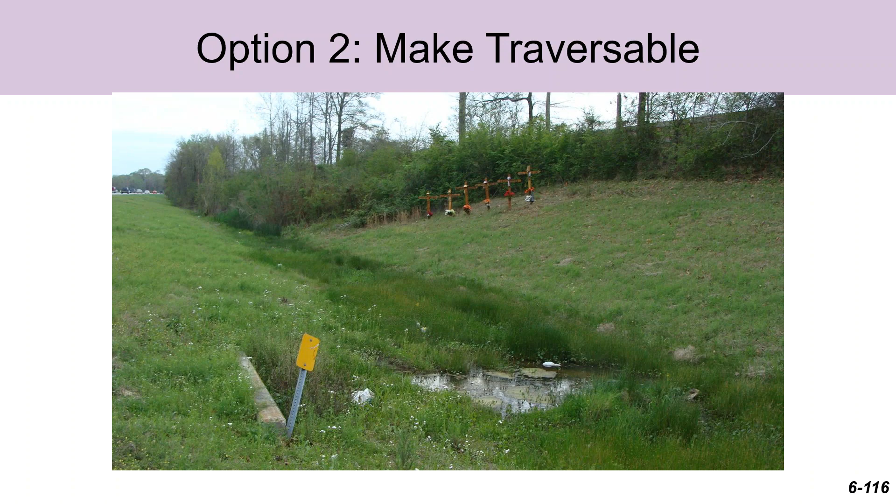Same way with this one, you can see this picture shows the crosses in the background where a fatal crash happened, a rollover because they hit that concrete culvert end there. So here's an example of a culvert that they made traversable.

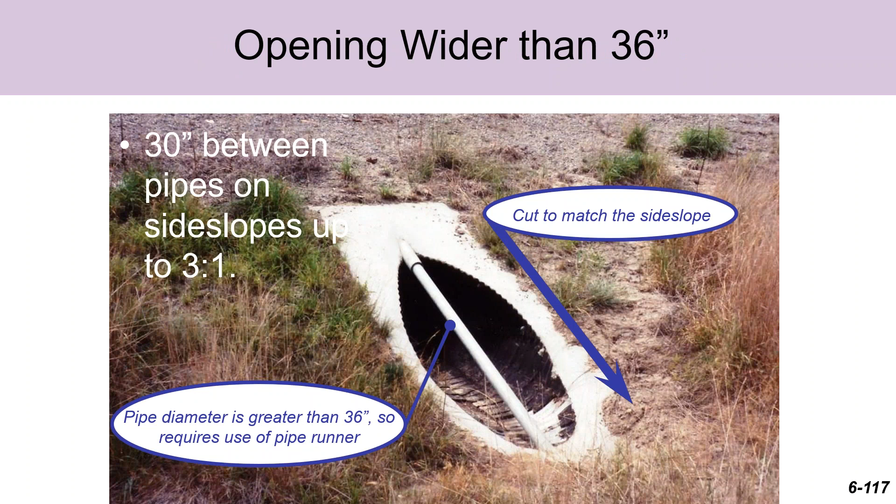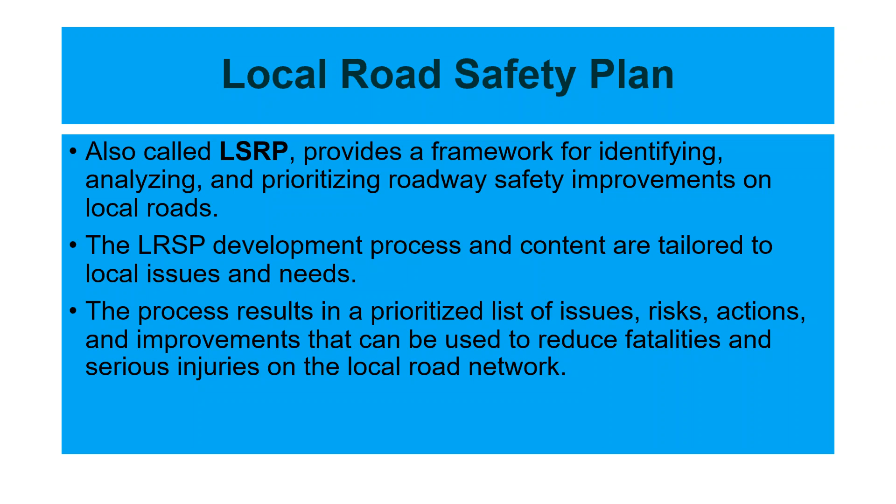Our next initiative is to create a local road safety plan, or LRSP. This plan provides a framework for identifying, analyzing, and prioritizing roadway safety improvements on local roads. The LRSP development process and content are tailored to local issues and needs. The process results in a prioritized list of issues, risks, actions, and improvements that can be used to reduce fatalities and serious injuries on the local road network.

So why do we want you to develop the local road safety plan? Because while local roads are less traveled than state highways, they have a much higher rate of fatal and serious injury crashes. Developing an LRSP is an effective strategy to improve local road safety for all road users and support the goals of a state's overall strategic highway safety plan.

Some aspects common to local road safety plans include stakeholder engagement, representing the 4 E's of roadway safety: engineering, enforcement, education, and emergency medical services. You have collaboration among municipal, county, or federal entities to leverage expertise and resources. A lot of our roads go in and out of different jurisdictions, from a local government, a village or town or township, into a county road jurisdiction.

Identification of target crash types and crash risk with corresponding recommended proven safety countermeasures, which you'll be using in your local road safety plan. You can also develop your own timeline and goals for implementation and evaluation.

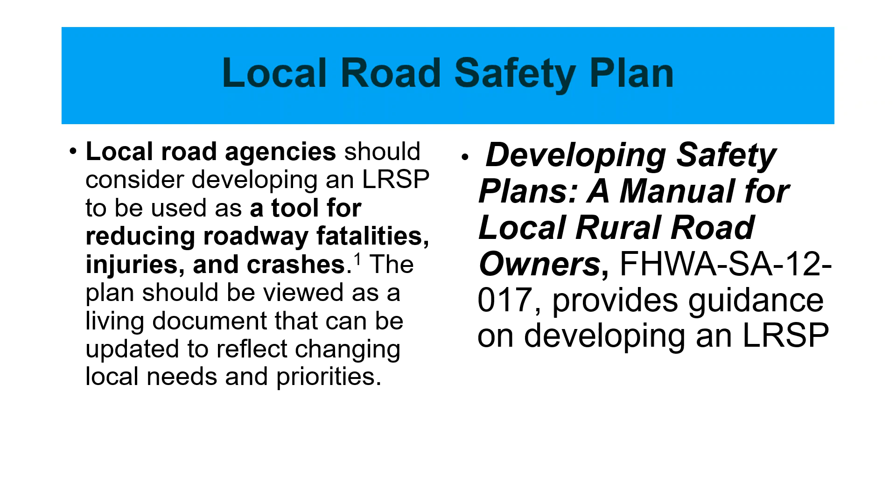So you would use the LRSP as a tool for reducing roadway fatalities, injuries, and crashes. The plan would be viewed as a living document that can be updated to reflect changing local needs and priorities. If you want more information on developing a local road safety plan, there on the right I have a reference manual from FHWA called Developing Safety Plans: A Manual for Local Rural Road Owners. You can just Google that document to find it.

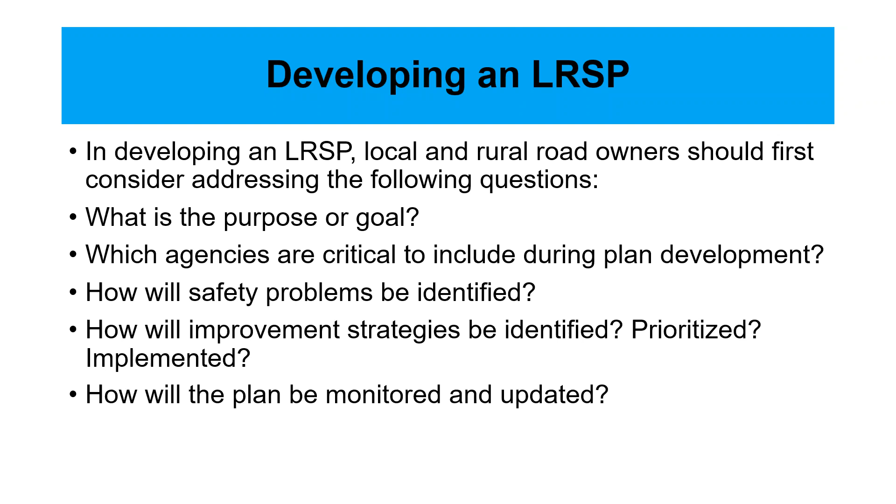So there's some more information on how to develop your local road safety plan. You should first consider addressing the following questions: What is the purpose or goal, and which agencies are critical to include during your plan development? How will safety problems be identified? How will improvement strategies be identified, prioritized, and implemented? And how will the plan be monitored and updated?

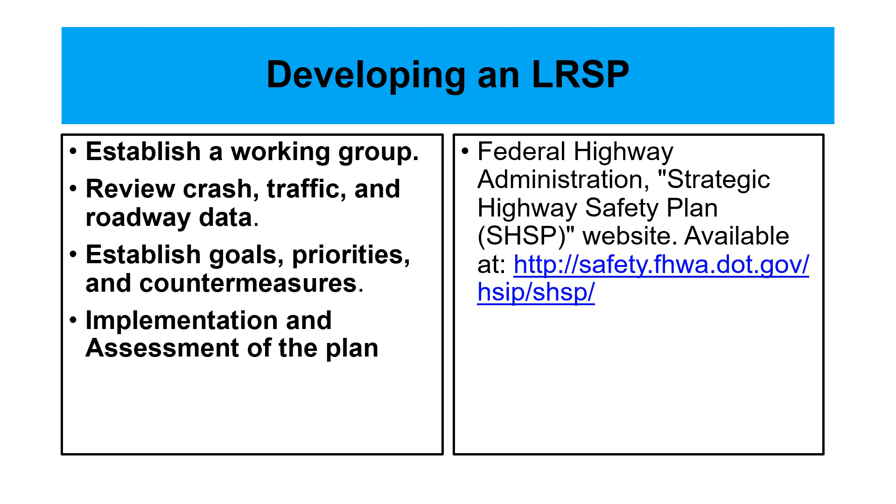And so it gives you a step-by-step guide on how to establish your working group, review your crash data, establish goals and countermeasures, and carry out implementation and assessment of the plan. There's another resource for you there on the right from the Federal Highway Administration called the Strategic Highway Safety Plan, available on their website: safety.fhwa.dot.gov/HSIP/SHSP.

Next, our last countermeasure or initiative is called Road Safety Audits. These have also been around for quite a while. Maybe some of you have even taken a road safety audit workshop here that we provide at least every other year at the Ohio LTAP Center. I know we're going to have one in 2020.

A roadway safety audit is a proactive, formal safety performance examination of an existing or future road or intersection by an independent and multidisciplinary team. The safety benefit is anywhere from 10 to 60% reduction in total crashes.

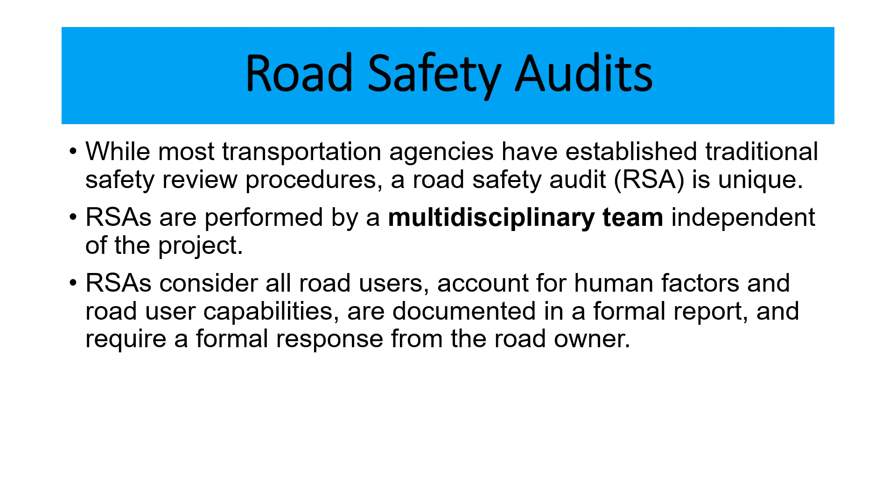While most transportation agencies have established traditional safety review procedures, a road safety audit is unique because it's performed by a multidisciplinary team independent of the project, considers all road users, accounts for human factors and road users' capabilities, is documented in a formal report, and requires a formal response from the road owner.

Lots of benefits from a road safety audit. It reduces the number and severity of crashes due to safer design, and reduces costs resulting from early identification and mitigation of safety issues before projects are built. It improves awareness of safe design practices, increases opportunities to integrate multimodal safety strategies and proven safety countermeasures, and expands the ability to consider human factors in all facets of design.

Shown here are the 8 steps of a road safety audit. The yellow diamonds represent the design team and project owner and/or roadway owner, and the blue diamonds represent the RSA team.

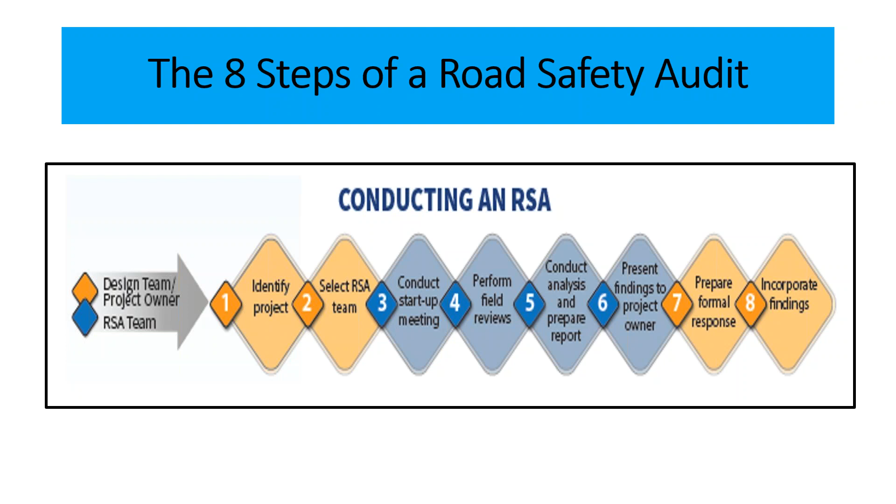It starts with the design team and project owner identifying the project and selecting the members of the RSA team. Then the team conducts a startup meeting, performs field reviews, conducts analysis, and prepares a report. They present the findings to the project owner, whether that's the county engineer, township trustees, or maybe even the state or a city engineer. The project owner then prepares a formal response to the report and incorporates the findings into the roadway.